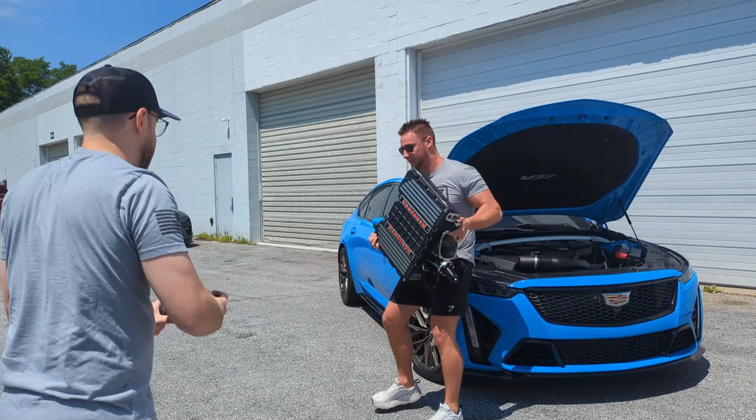We're back. Oh no, damn it! I wanted to enter this one too! For the Caddy one? Yeah! It's still there. And here we have a YouTuber in their native environment, taking their thumbnail, struggling to hold a 100-pound blower. This YouTube stuff is hard work. My new car! Oh, I love these seats! Yeah, they're nice, man. That was heavy. Had to get that. See you, Mike! Oh, bye, buddy. Dude, I'm sweating now.

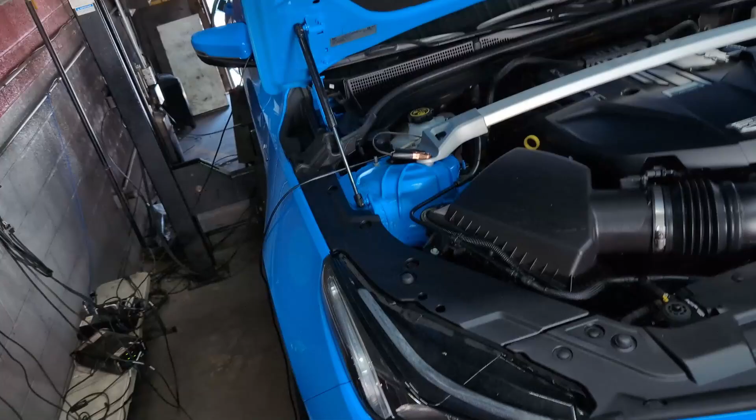Had to lift that supercharger for like 20 seconds. There he goes. Legit, the Magnuson. My gosh, this car is pristine. It's bone stock, as far as I can tell, it doesn't even have upgraded wheels. It might have an optional coated wheel, or he might have had them powder coated, or the previous owner did. Are those factory? These are factory bronze wheels. Okay, so we've stooped that far. But as you can see, bone stock, and miraculously, this thing for a '22 is just perfectly clean, like the engine bay, unbelievable.

So we're gonna mess that up in a sec, but until we do that, let's get some baseline numbers. I got her strapped down to the dyno here, and I actually did that myself this time. I didn't have anybody else do it. Matt tried to help though. No, I didn't. Oh my gosh, these seats. I love this car, I really want this car so much. I can't believe it's a giveaway. He can't even sell it to me because it's a giveaway. Bastard. Okay, let's find out.

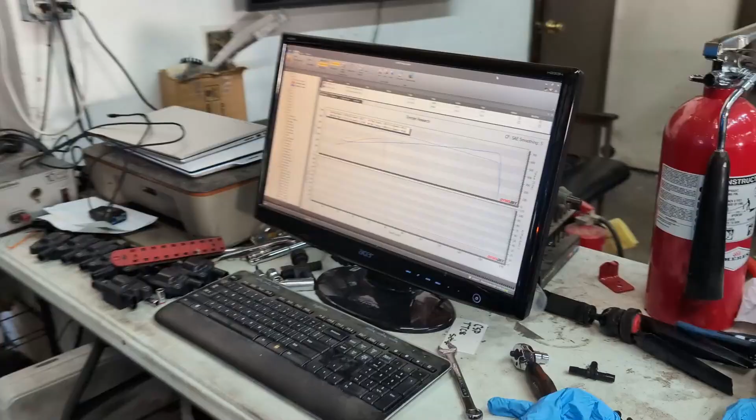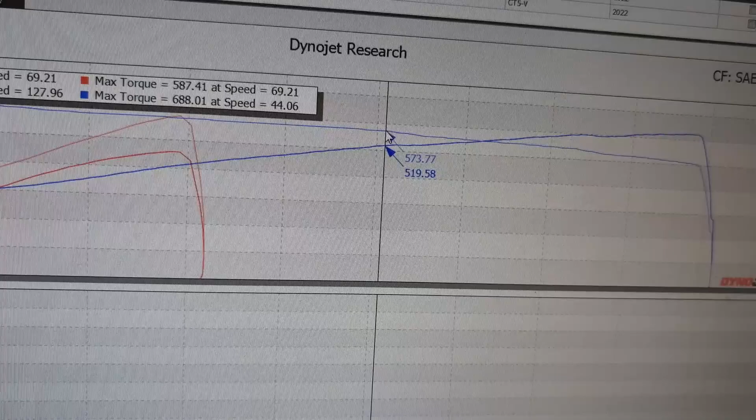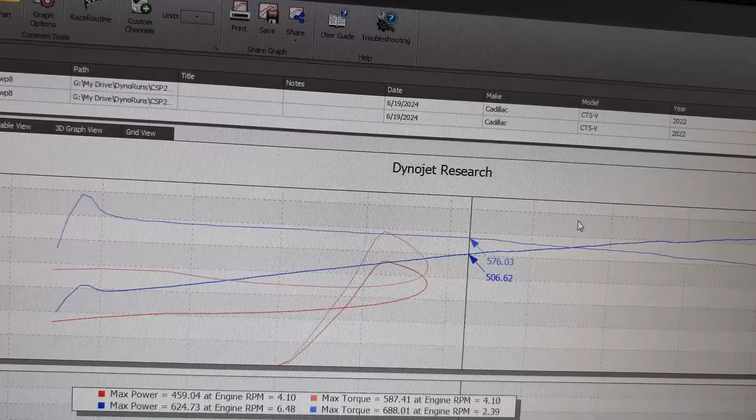These things are just freaking nuts. 624 baseline, and it says 688 foot-pounds of torque, but that's not real—the RPM reader just didn't catch that part. It's more like 570 torque, let's see. It's probably around 570, maybe 580 torque, somewhere in there, but that's ridiculous for bone stock. So there it is. We got two manual CT5Vs that dynoed over 620 rear wheel horsepower stock. That's nuts, completely nuts. Let's do some more pulls and see how she holds up.

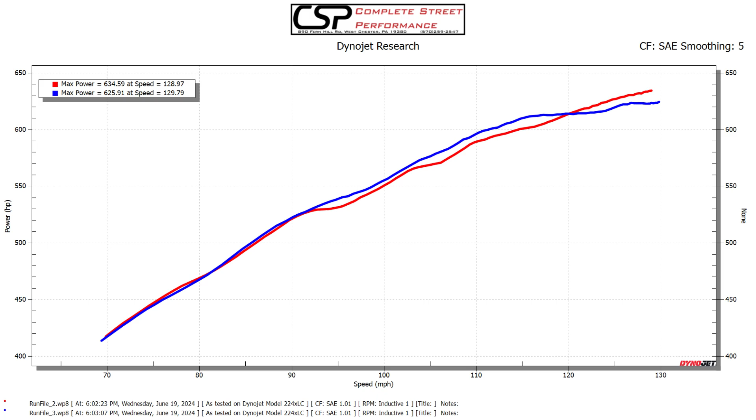Honestly guys, I cannot believe how well this thing does. It is completely freaking nuts. It made 634 on the second pull, and then without hesitating, backed it up with 625. Basically I got the wheels to stop, and then I started them right away. That's just insane. This car is nuts. I love it, I love it so much.

Just the right amount of burbles. Yeah, no, 1,000 valves open.

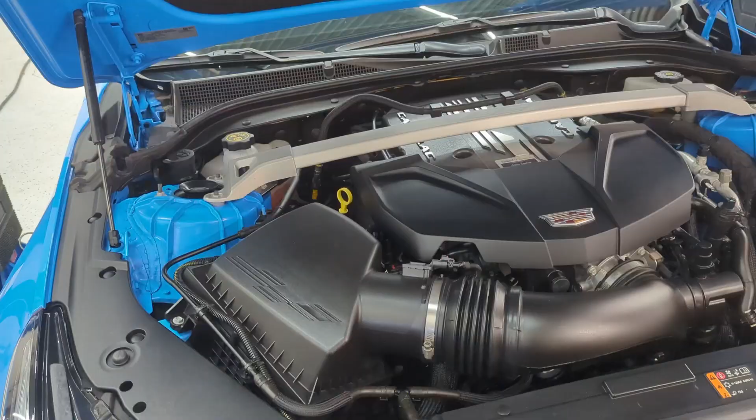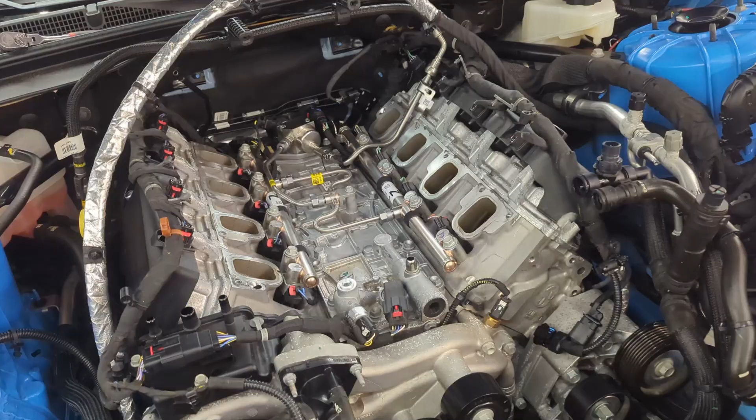Man, that happened really fast.

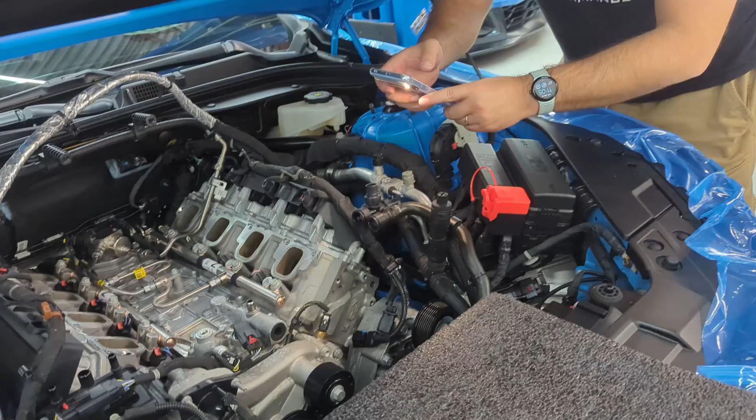How's this thing look? It doesn't look bad. I mean, it ran really good, but with these direct injection engines, sometimes you get a lot of carbon buildup on the valves. I can't even see in there right now. Can you see in there? No? Looks fine. We're gonna run it anyway, so what does it matter?

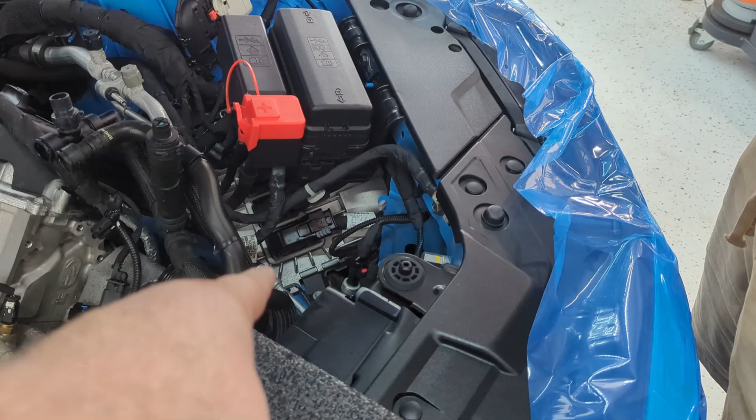Well, we need that. What, the computer? Not yet, we're gonna run it on the factory tune first. Yeah, you should be able to run this on the factory tune, just the Magnuson alone. Now obviously it's not as simple as the Magnuson alone because there is no Magnuson kit for this—at least not from Magnuson. There will be one from us. I did see the Boost District, so I assume that this is the tune thing, but I did see Boost District did not offer a tune with their package. It looks like it's just a hot rod kit marked up a lot with a fuel line added, and that's kind of what we're gonna take a look at here and see if that works. So that would be really cool if it does. Now I have a question.

Since I watched your video on this car on the dyno, I saw it spiked to 32 degrees of timing. With the Magnuson on it, will it run 32 degrees? Did it spike to 32? I thought it went up to 27. No, it spiked to 32. I don't know if that's true. We're gonna have to see the video evidence before we answer this question. But I don't think 32 is in there.

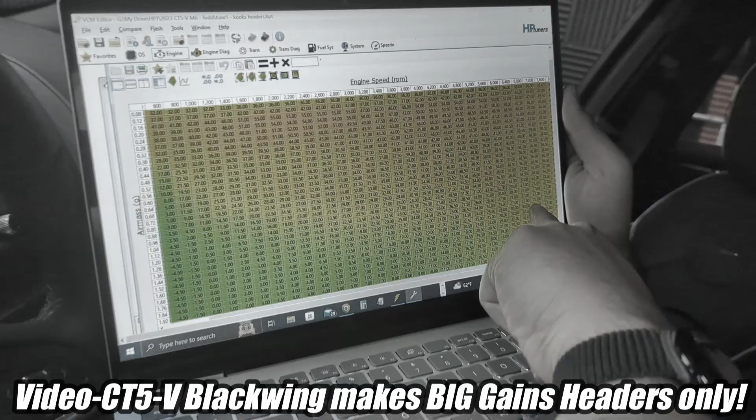There's a spread of 32 degrees at the full throttle-ish area. It might not be entirely full throttle. This area down here might be more full throttle, but there's a spread of a lot of spark advance here that probably, I don't think it should be there.

So upon further reflection, thanks to Matt being correct, I have that on video now. Yeah, the factory does command up to 32 degrees. I don't know that it delivered that. I can't remember that, and neither can Matt, thank God. So, but I do recall something like 28, 29. It did ramp up right at the end.

Yeah, I imagine this probably does it too. It should avoid that area, or it will tune itself out, because what happens is when it starts pulling timing, it kind of remembers those zones, and then it maintains a level there that should just keep everything safe. So we'll review that and make sure that everything's okay.

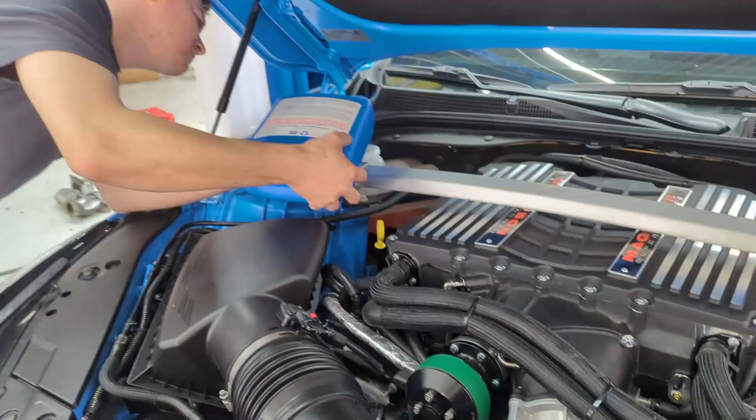Alright, we got Max here putting the finishing touches on, just topping off the fluids with some water. This was low when it came in.

Huh. Thank you for that insight.

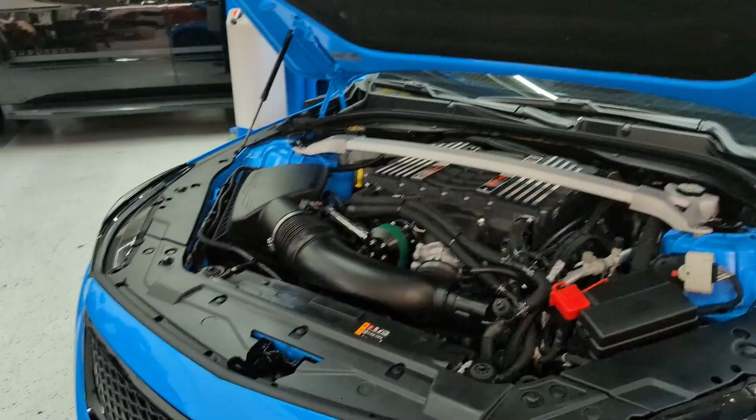Oh boy, oh boy, oh boy. First start of the CT5-V Blackwing with the factory tune. This computer is bone stock. It's under yonder here.

Fire up. Fires right up.

Look at that. Not even a check engine light so far. We haven't gotten far enough to know if we're gonna not have a check engine light, but so far so good. Look at that.

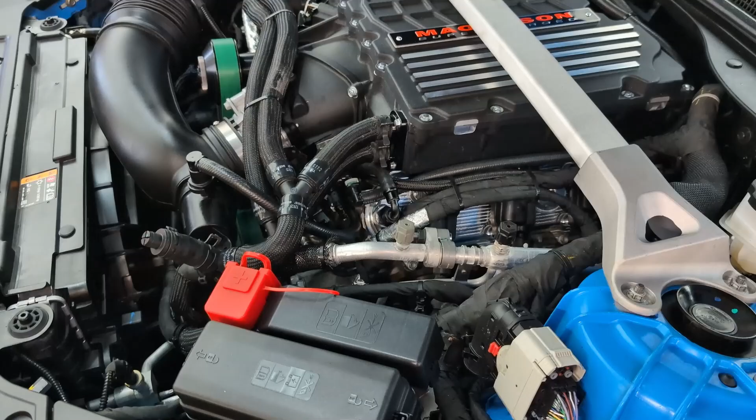That is awesome. Dyno time.

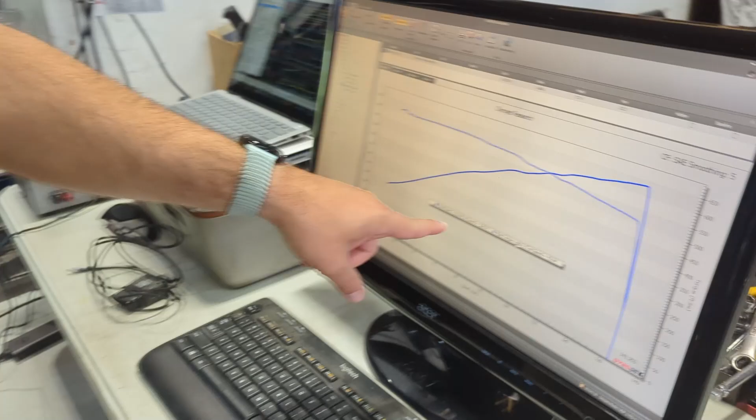So now is the moment of truth, gang. This is gonna be the exciting part because this thing dynoed really, really well from the factory. It dynoed at 633 and 617 foot-pounds of torque.

As you see, based on the video, it ramps up the timing rate in the end, as Matt has confirmed earlier in this video. And well now, bolt-on Magnuson 2650, no tune, factory intake, the 90 millimeter pulley, factory throttle body - basically everything factory, including the factory computer, factory tune, untouched.

So warranty, powertrain warranty would still be present, not really voidable unless you take it to the dealership with this. I'm not recommending you do that. Like if it blows up, then it's on you. Don't cause a failure and then make GM pay for it. But I don't think that that's what's going to happen.

We're going to double check it right now and get those answers, see what kind of gains. Is it going to be safe? Is it not going to be safe? Because this car has factory widebands and the ability to basically self-tune itself. It should just run and be awesome. And if it doesn't, well, we're going to tune it anyway because we got headers to install with cats.

Then we want to tweak things a little bit and maybe even add a little bit of boost. We'll find out what happens. Okay, let's do it. Fans on. Look, turning all the fans on right now.

Setting up the computer. Again, Mike's name in here. CT5-V - I gotta remember that it's not a CTS-V. And StreetSpeed717's.

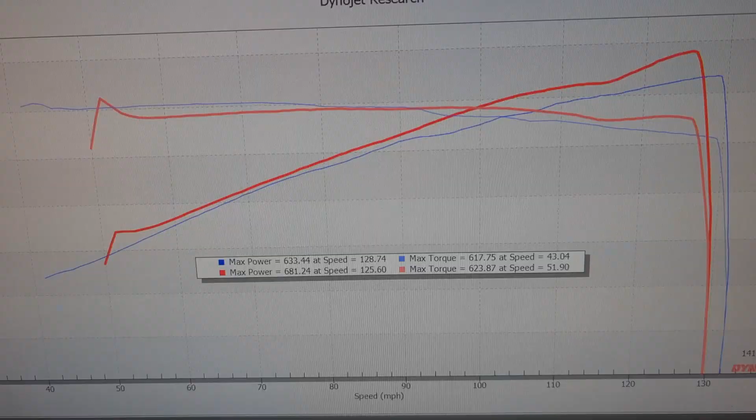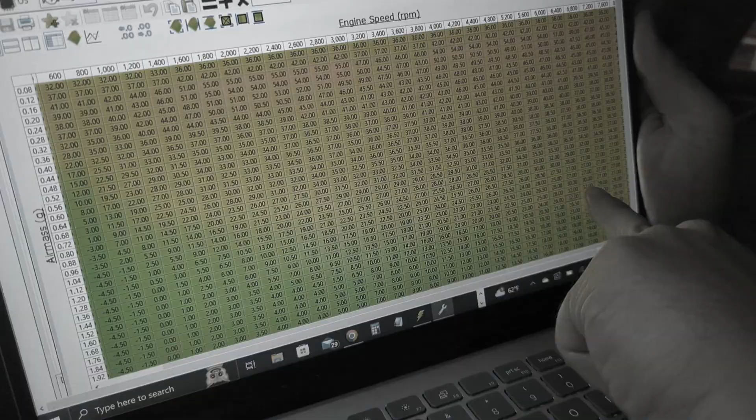Looks like somewhere in the high end it may have pulled a little bit of timing before ramping it back in. Well, maybe it's just hitting that oddity. 32 degrees. So we'll run it again, but it looks to me like it's the wheel speed throwing the check engine light, which is common on the Global B stuff. I'm going to double check the codes, but I think this is going to be a codeless install with a bunch of extra horsepower. So that's pretty cool.

So I can confirm that the only check engine lights are on because of the dyno right now. In terms of how it actually performed, it looks like we're seeing about 11 PSI. It does ramp up to 27 degrees of timing. There's no knock retard from what I see. The fuel trims are almost perfect, which is amazing. And the temperatures start at 115 degrees, and by the end of the pull, it's still at 115 degrees, which is absolutely incredible.

I'm going to run it again for good measure. I don't think that we're going to be able to get rid of that weird oddity in the dyno graph, because it's part of the tune where it ramps up really fast in the high end. 32 degrees. When we get to tuning, we can adjust those things, but I think as is, we're seeing this thing do a really good job, and something that will hold the power out throughout a very long pull, as opposed to where the factory blower runs into its heat soak. So let's run it a couple more times, and then maybe rip around on the street.

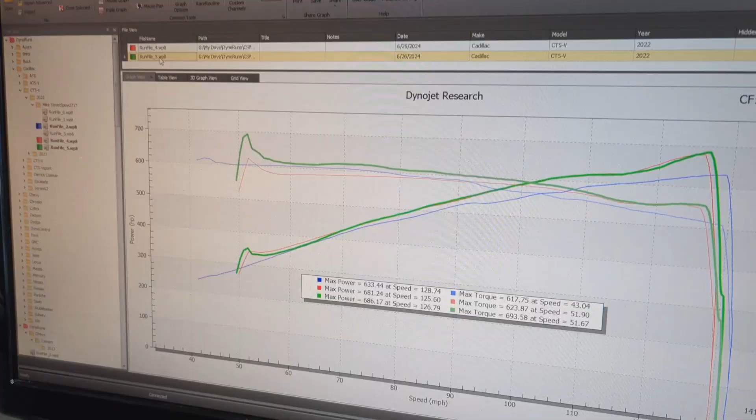What did it do? 686. I wonder if it can hit close. I mean, look, if we're doing STD numbers, it's over 700, but 686, that's a pretty big gain.

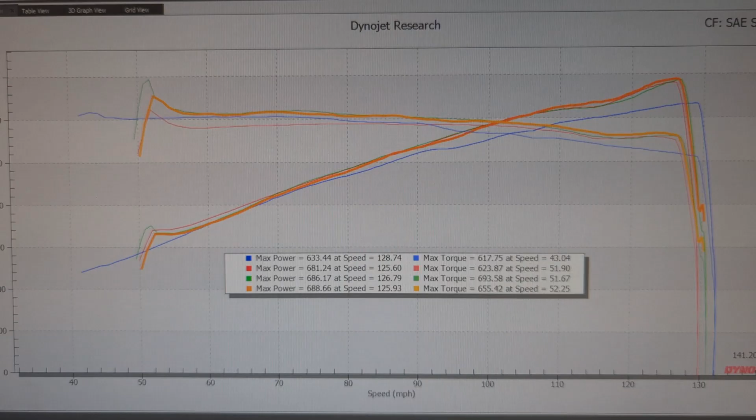Pretty good. Yeah, I don't think this thing needs a tune. I think it's actually doing great. Need is a strong word. Need is like, does this need a tune? No, it doesn't need one. Can it benefit from a tune? Yes, I believe it can benefit from a tune. But a tune is also quite a bit more expensive. But granted, the Magnuson's expensive, so I would probably do this in conjunction with a tune.

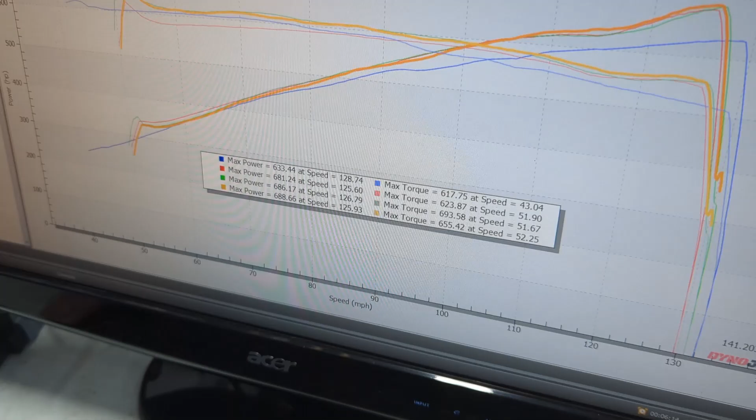But we're gonna test headers next. So these numbers are looking really, really good. I mean, this is without any tuning. You can see from the factory tune to this one that it's really picked up throughout the whole RPM band. We've got more torque, although the torque's a little bit of a misread here.

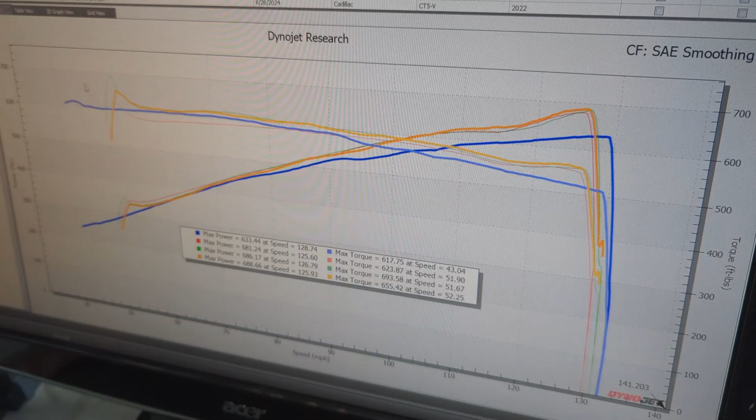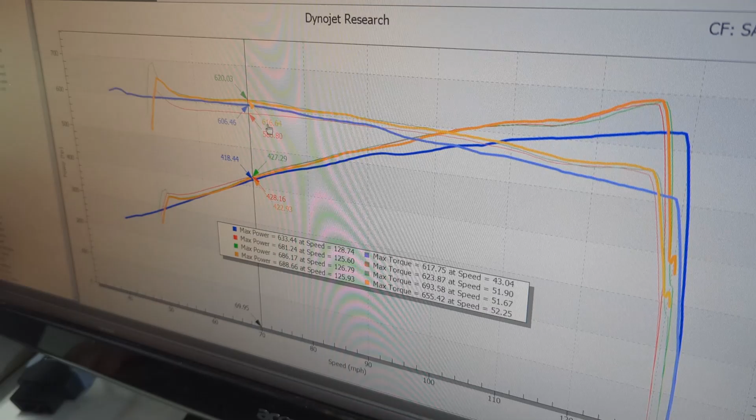It's more like 616-ish foot-pounds of torque, at least peak torque. It's, I don't know, it looks higher. Is that right? It says 616, but it's like higher than this part. Oh, it has a little blip from the factory one as well, so it's like 606 to 616, yeah.

And then, otherwise it just continues to pick up in the important parts, the higher RPM, where it's in what I would consider the racing band. And the only thing that I want to do now is try to refill the heat exchanger, just to make sure that if there's any extra air bubbles in there, we get them all out. So we're going to do that before the next pull, and then ideally we're set up. So Max, would you be able to do that?

Sure thing, boss. Okay. Well, how'd the AFRs look? Good. I mean, it's all Global B, so it's like wideband controlled. Really? So it's like it tunes itself. And it was actually really close with the factory intake. It was within 5%, a normal correction factor, so that's cool. It's solid. It basically tunes itself.

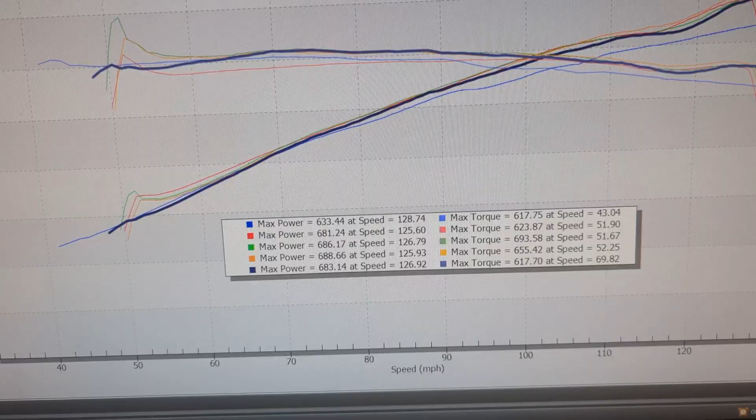Cool. Well, I think that's as far as we get without actually tuning this thing. We're getting somewhere between 26 and 28 degrees of timing up top. It is hotter today than it was on the black CT5-V, so it's tough to exactly compare things, but man, that's some good numbers from just bolting it on with the factory tune.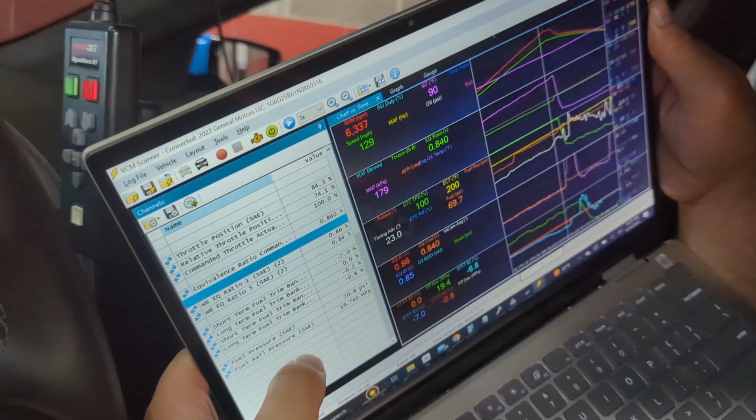688. I can't actually tell, unfortunately, because the computer's not unlocked. I can't tell a couple things because some of the data that I log for the Global B stuff is just not there. It's not available unless the computer's unlocked. Normally what we'll see is a lot of other stuff I log, like intake, cam angle, desired angle, stuff like that, in order to determine whether we're close to being out of fuel or not.